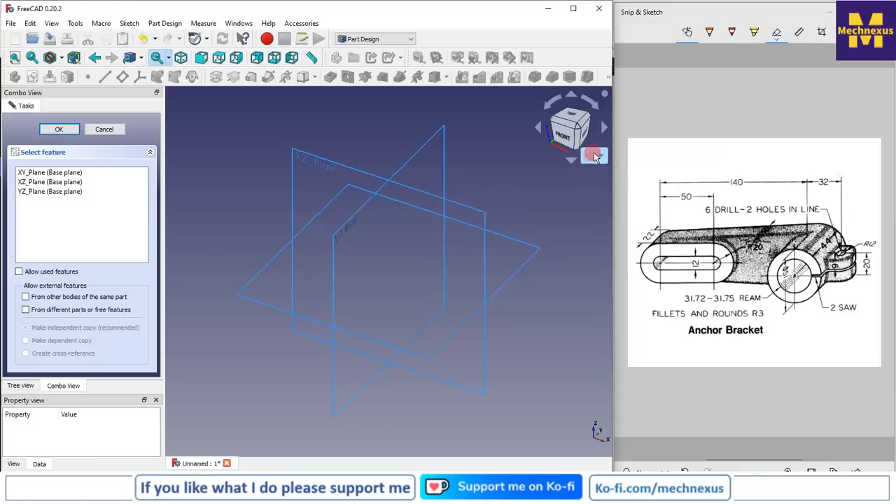I will close this file and create a fresh new file. I create a body and then create the sketch, and I will select this XZ plane, and I will make my center, this hole center, at the origin point.

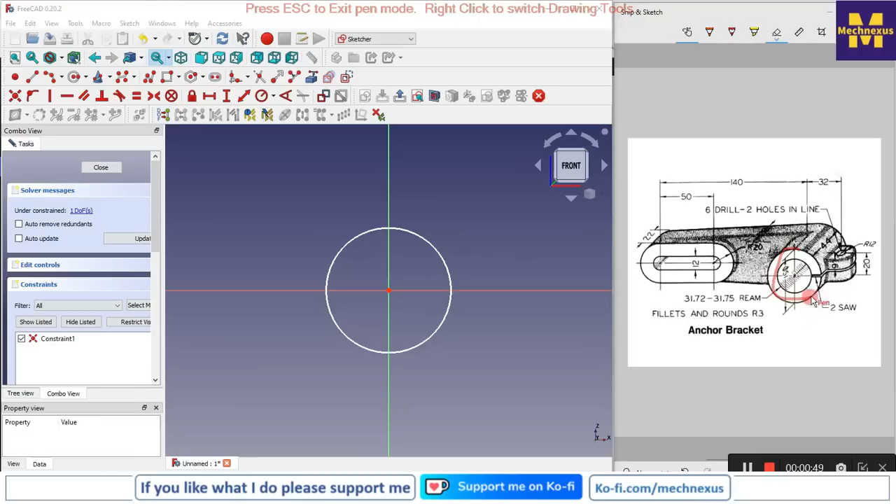So first I will make this circular extrude like in this direction, and then on the back side I will create this whole profile, and then I will extrude it. So that is the idea of the modeling.

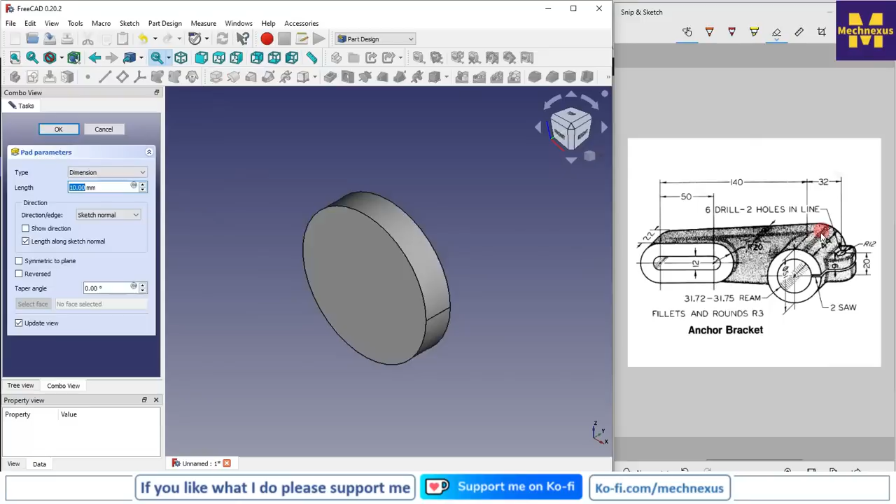Now I will give it a diameter. So diameter is 51, so I will give 51, press enter, and now I will come out of the sketch, and I will go for the pad. Pad dimension I see here is 44, so I will give here 44 and I will say OK.

And now on the back side I will create the sketch, and I will switch to the isometric to know that. So I will move to the rear view, and now here I will project my diameter.

Okay, and now I will draw the two lines, approximate lines, and then I will select this and this, and I will give tangential relation, and same here.

And now I will draw a 3-point arc here, and I will make this and this point as horizontal, and I will make this and this tangent, and here radius is R20, so I will give it R20.

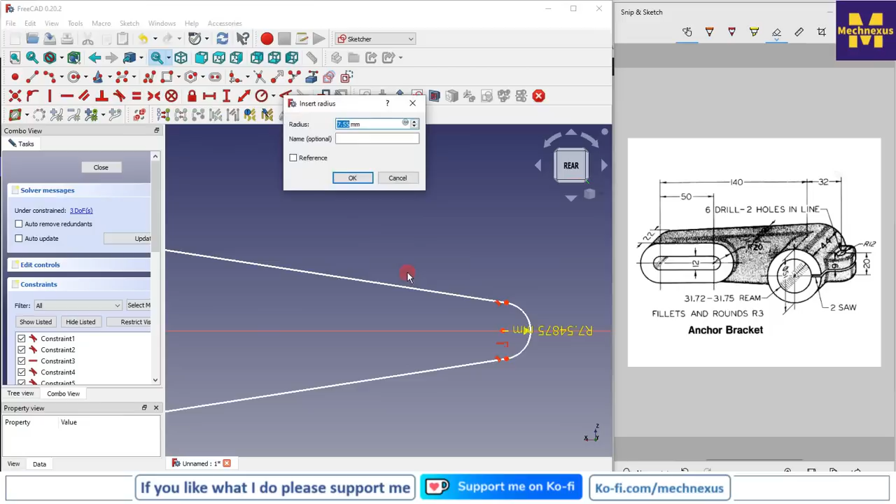And now I will draw a 3-point arc here as well, and I will make it tangent.

And now I will merge these center points. So here is a conflict, so I will select this constraint 3 and I will say delete. Again there is a constraint 2, so I will say delete.

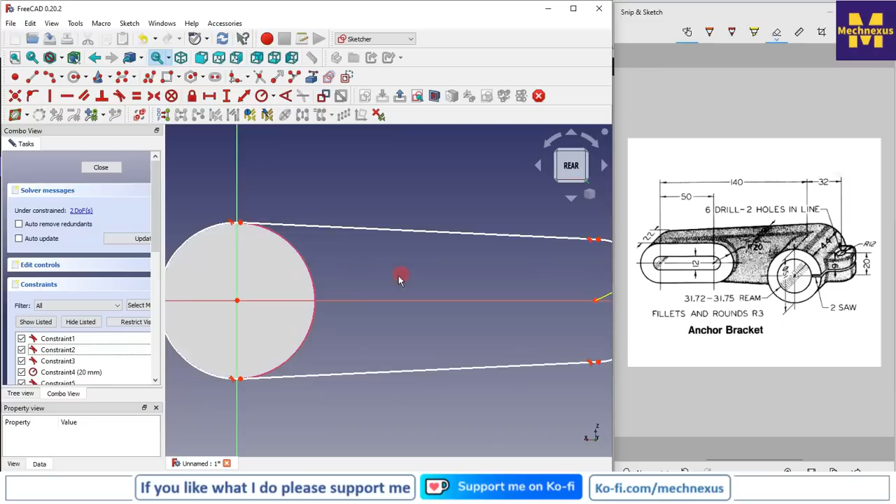Okay, now I will give my dimension from center to center. Here it is 140, so I will give here 140.

And now we will see what is unconstrained. So this is the unconstrained, so I will select these two center points and give horizontal constraint. So now our sketch is fully constrained.

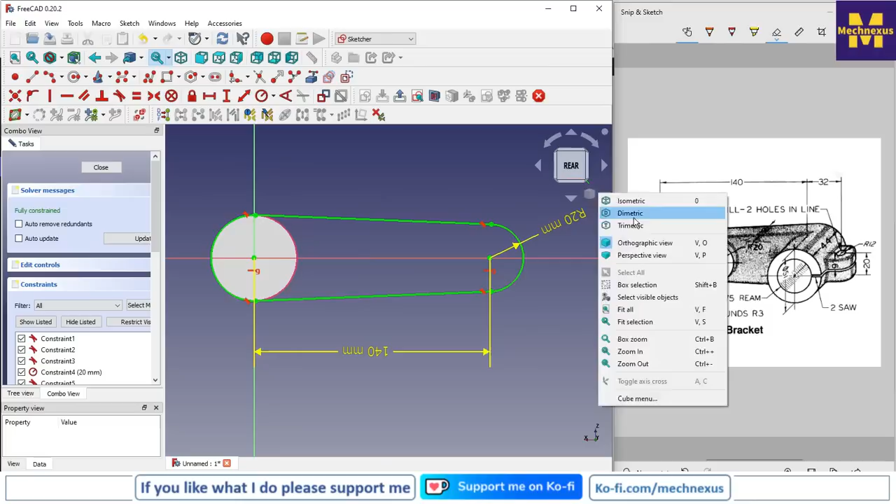Now I will come out of the sketch and switch to the isometric view, and I will click for the pad. Here I will reverse my direction, and here the pad distance is overall given as 22, but here I am unable to read the dimensions.

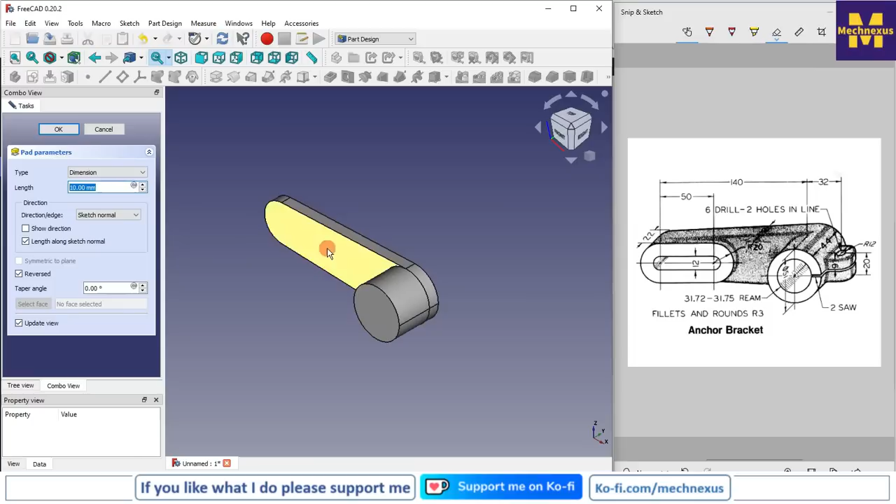So I will give it approximate, later we can change. So whole it is 22, so I will give the 10. So it is 11, so I would consider the same thickness, so I will give the 11 and I will say OK. Now here you can see that these two extrude features are merging.

So to resolve that, I will click on pad 1, and here in part design refine I will set true.

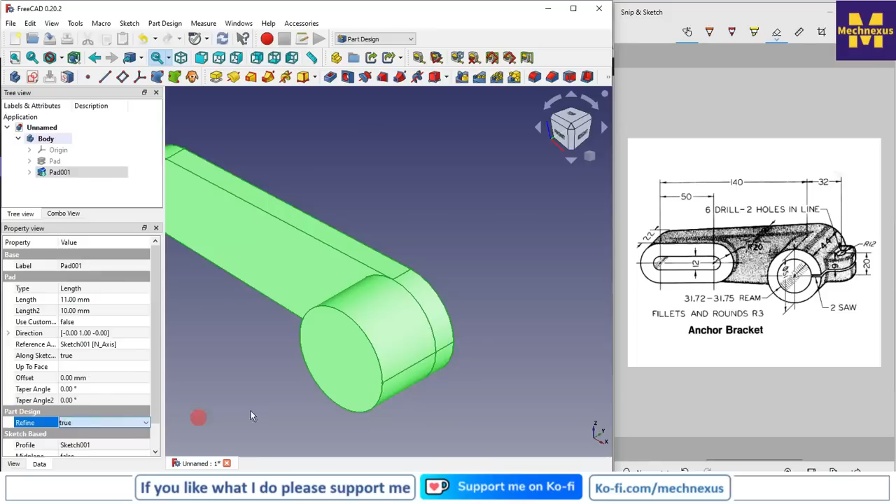Okay, so now I will create this pad here. I will select this face and say sketch, and I will project this arc. I will click on the edge and project it, and then I will select for the slot.

And now slot radius is R20, which is given here. Now I will give center to center dimension, which is 50, so I will give it 50.

Now I will close my sketch and I will go for the pad, and here I will give it 11 mm.

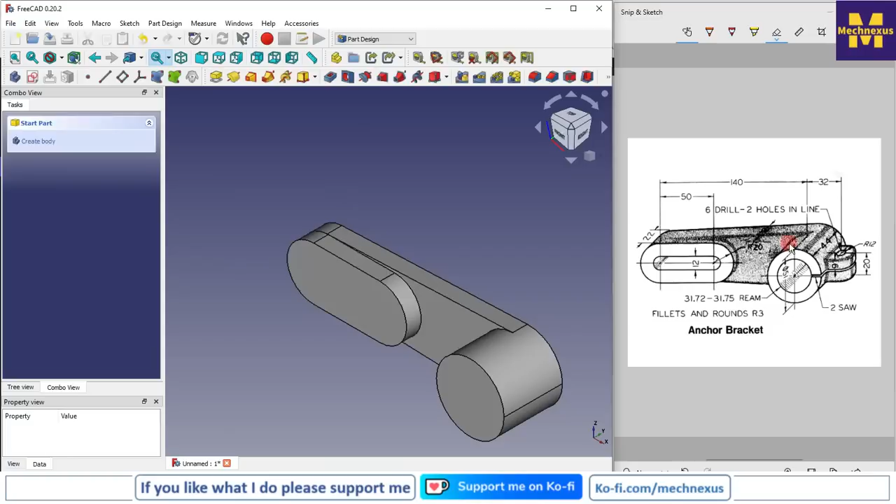Okay, so this 11 mm looks like too much, so I will give this pad 15 mm, and this pad would be 7 mm.

Okay, so now material removal we will do later at this location and these locations. First we will make the solid features, and now we will make this feature, this one here. So for this I will create the sketch on this face. I will select the face and create the sketch, and I will project my diameter.

Okay, so overall height is 20, so I will create a 3-point arc, and I will make it equal. I will say merge, and I will delete this constraint. This as well. Now I will drag my arc here.

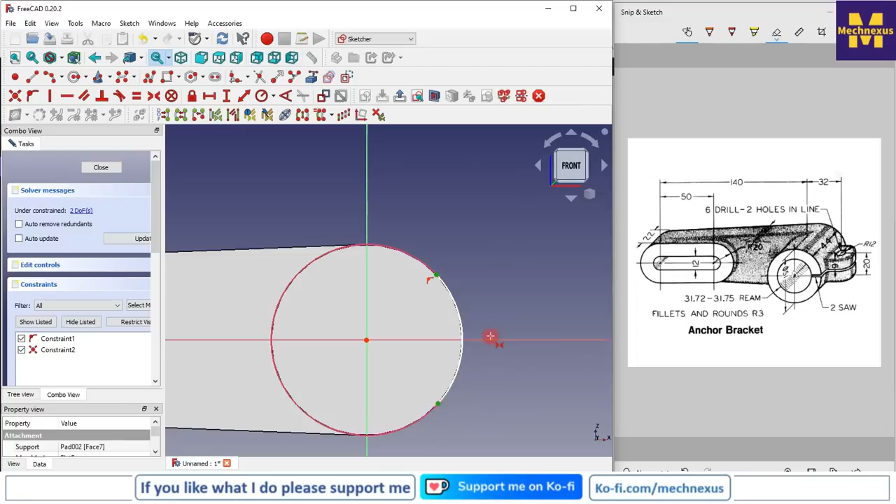Now this is the 20, so it should be symmetric. So I will select this one and this one and my axis. Now it is symmetric. Now I will select the polyline and I will close my profile.

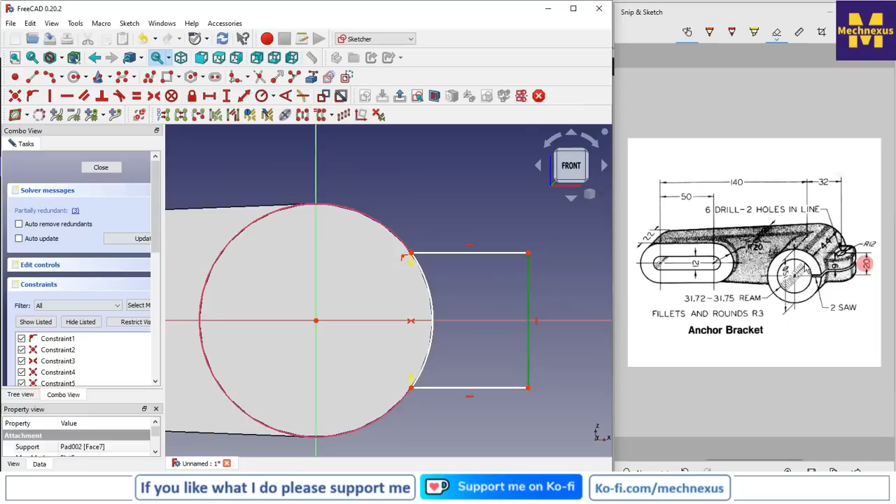Now I will give it horizontal constraint. This one will be horizontal. Now this dimension is 20, so I will give it 20, and here is a R12, so I will give this one R12.

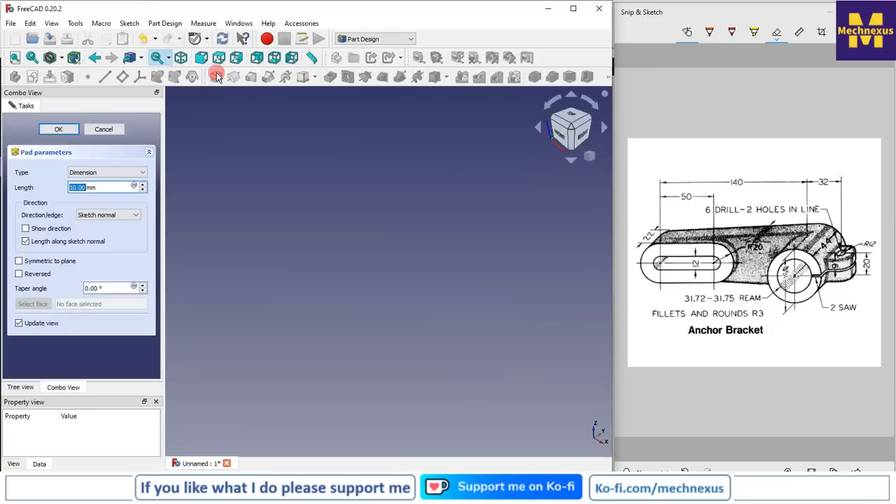Now I will come out of the sketch and click on the pad, and I will say here reverse, and from here I select up to face, and I will select my back face, and I will say OK. Now I will switch to the isometric.

Now we will do the material removal. So first we will remove the material at this location. So I will select this face and I will say sketch.

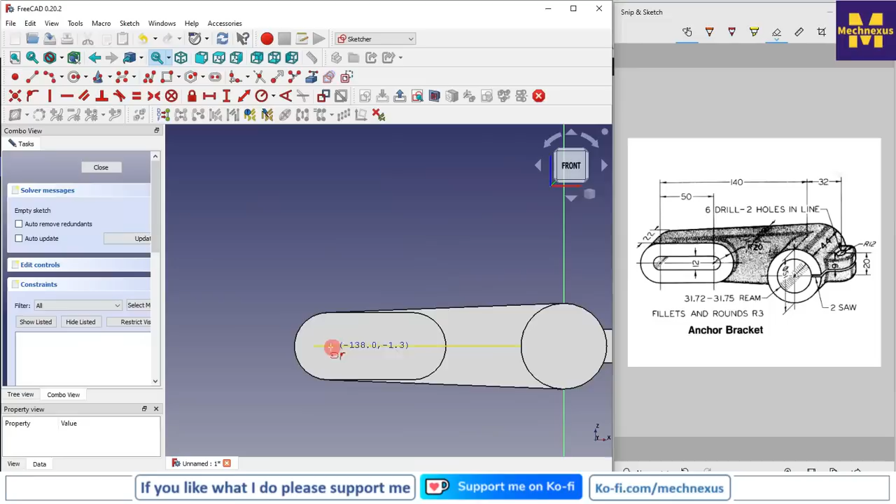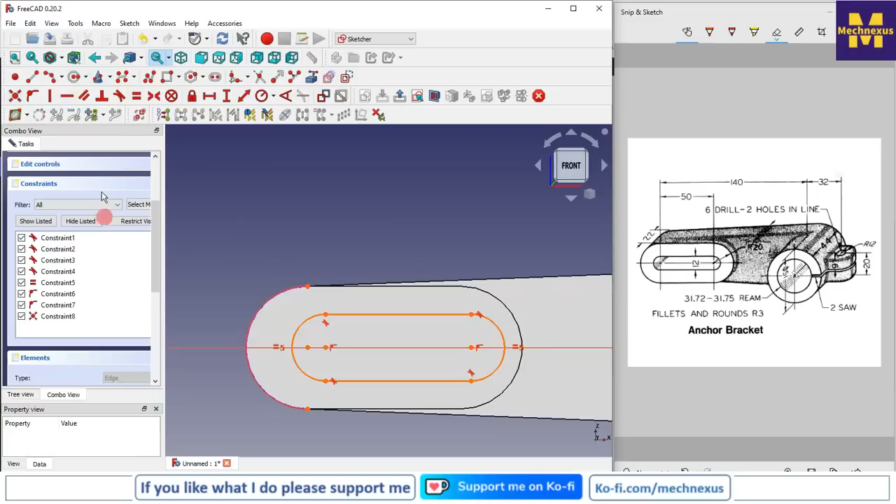And now I will select the slot and create a slot here, and I will delete this, and I will project my edge, and I will merge this to center, and I will delete this constraint.

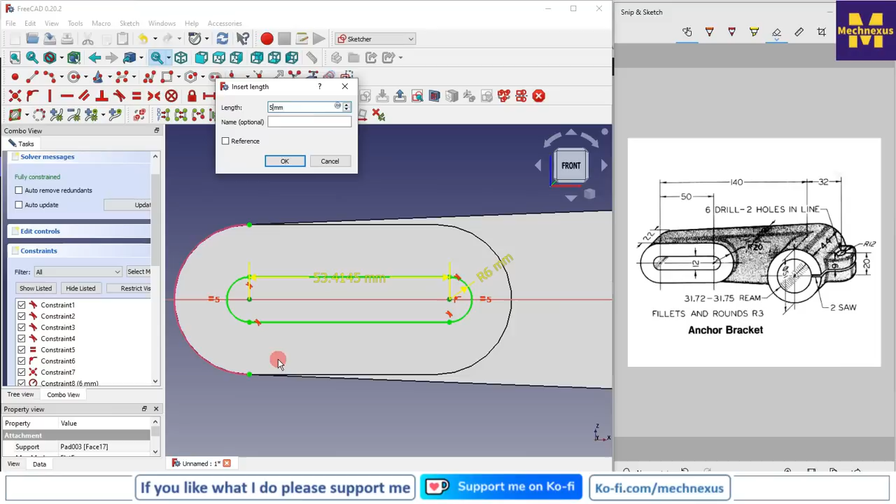So now diameter is 12, so radius will be 6. Now center to center dimension is 50, so I would give it here 50. So our sketch is fully constrained.

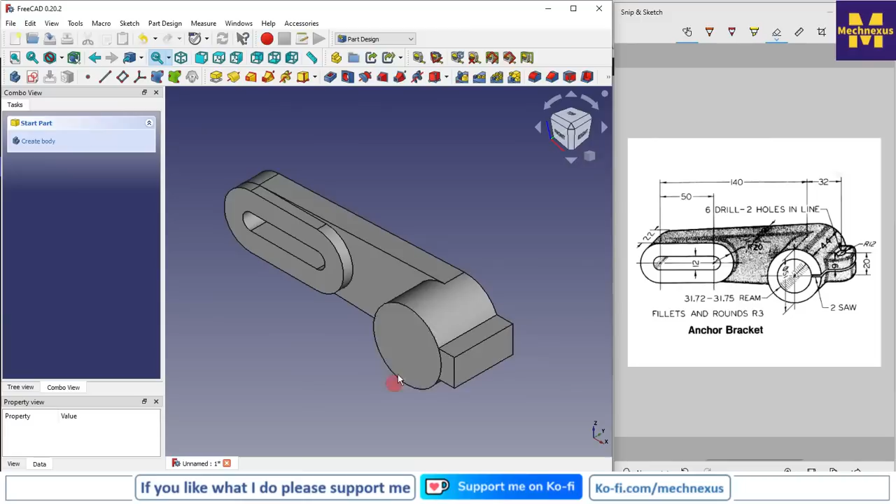Now I will come out of the sketch and I will go for the cut, and I will say through all. Same way here we will do it, but we will do it in a single sketch here.

Now I will select this face and create the sketch, and I will switch to the isometric view, and now here it would be at the center, so I will project my edge. I will select this edge, and I will project this edge as well, and now I will select the 3-point arc.

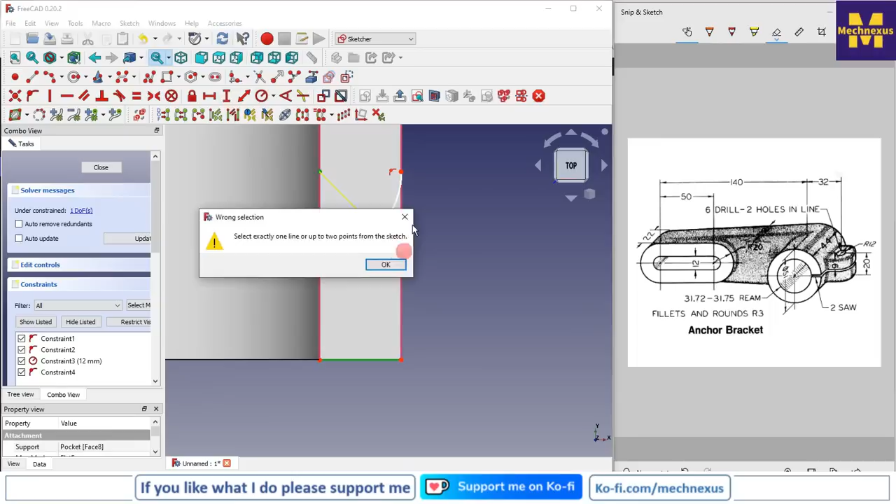And now I will switch to the top view. So this radius will be R12, so I will give here 12, and I will make this point and line coincidence, and from the edge it should be from this point to this one. I will give 22 and I will say enter, and now I will close my profile.

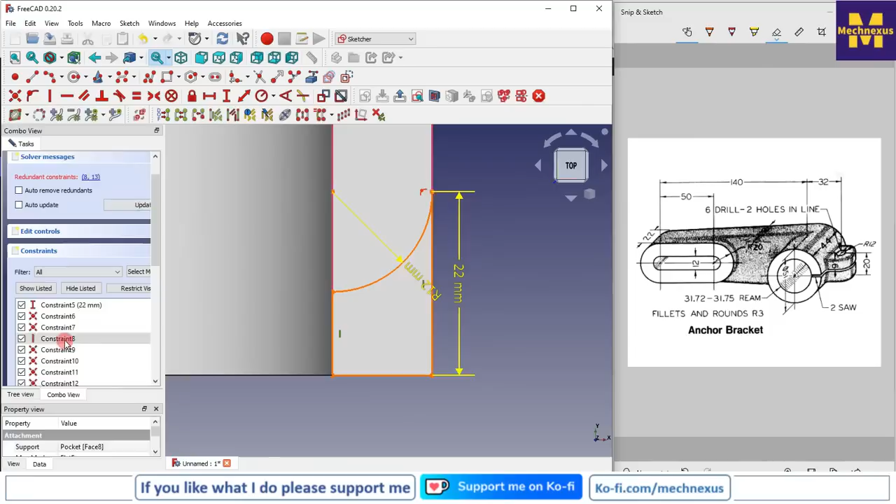So I'll select the line, so here is a conflict, so I will delete the constraint. Okay, so now our sketch is fully constrained.

Now we will simply remove the material. So I will go for the cut operation, and here I will say through all, and I will say OK.

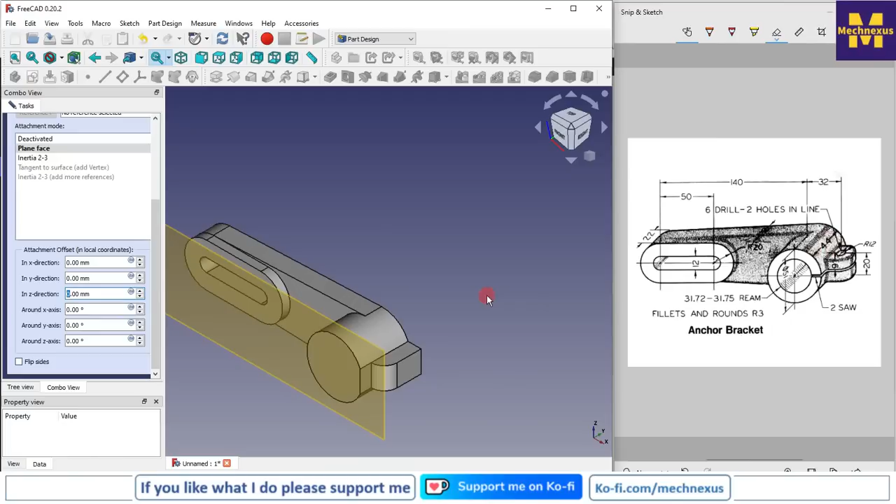Now I will select this face and create a datum plane at a distance of 22, because we see our dimension here is a 44, so I will give 22, but I want in a reverse direction, so I will say minus, and I will say OK.

Now I will say mirror, and from here I will select my reference, so I will select this one. So you can see it got mirrored. Now I will off my datum plane.

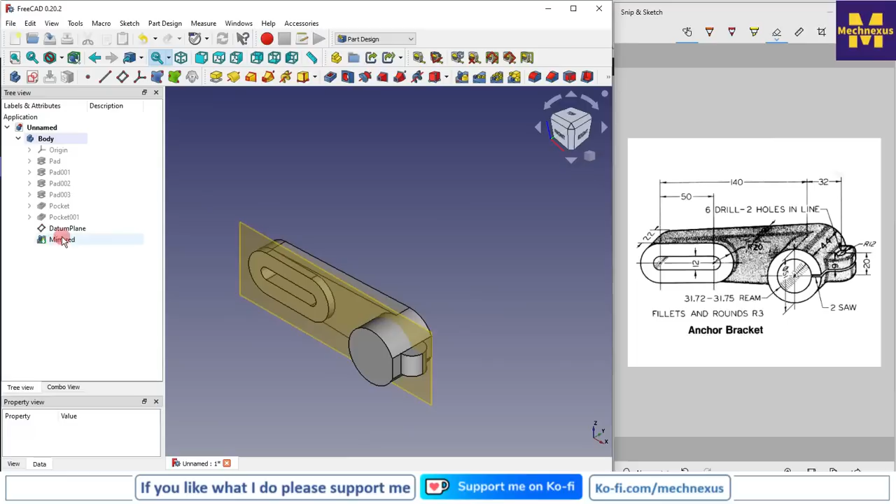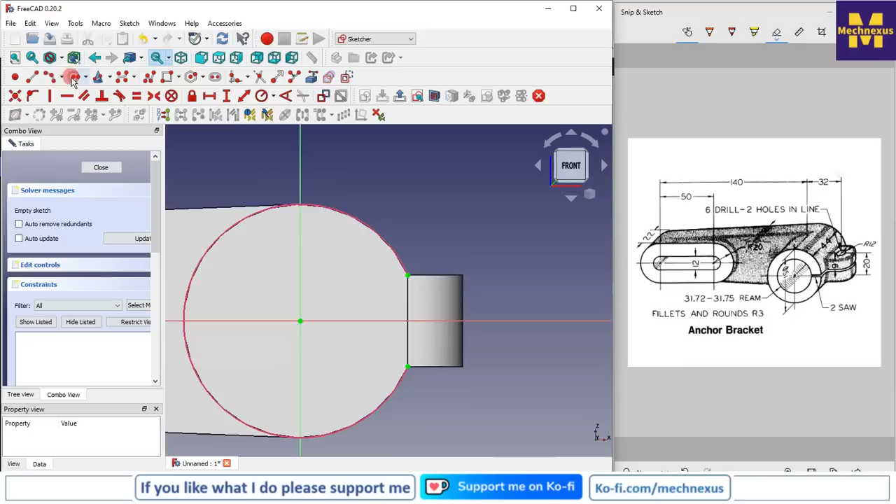Now we will close the material at this location. So for this I will select this face and create a sketch, and now I will project my diameter, and I will create a 3-point arc.

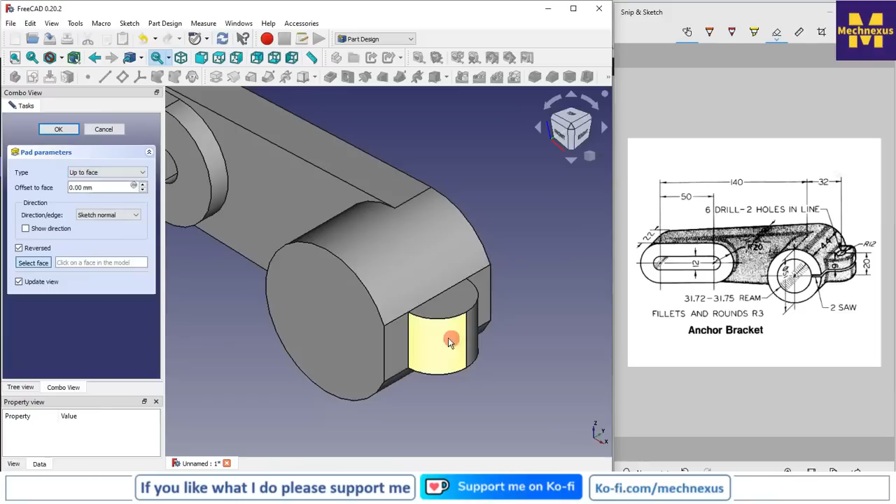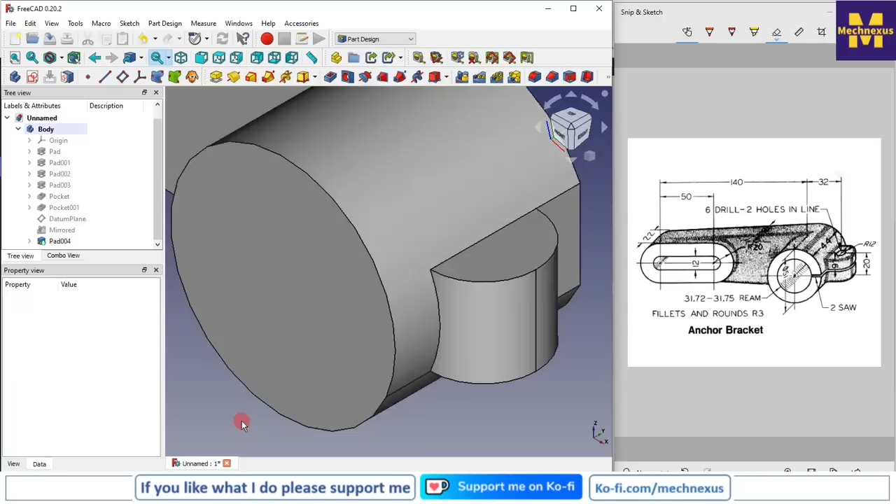Okay, now I will merge these 2 points and close the profile. Now I will come out of the sketch and go for the pad, and I will say reverse, and from here I will say up to the face, so I will select this face and say OK. Now this does not look good, so I will select my feature, which is the pad, and I will say refine true. So you can see that it got removed.

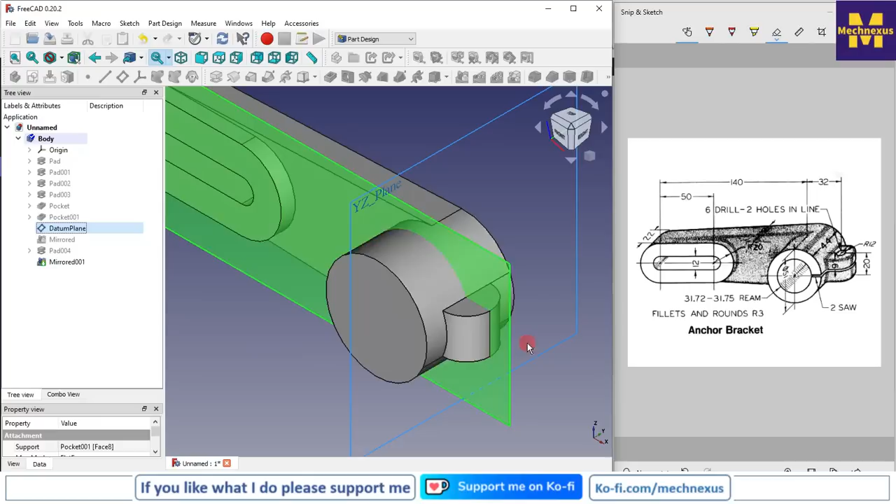Now I will select my pad 004 and go for the mirror, and here I will select my reference manually. So I will select this datum plane, so you can see that it got mirrored, and I will say OK. Same way I select for the mirror, and refine, I will say true. Okay.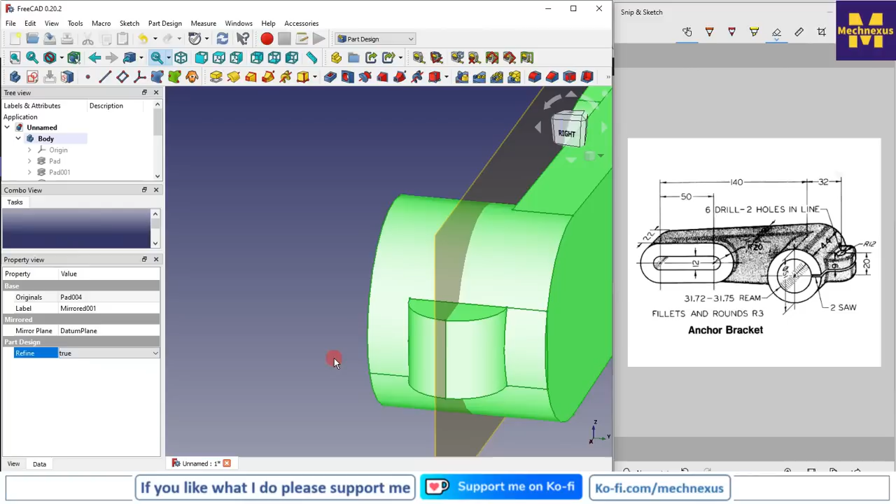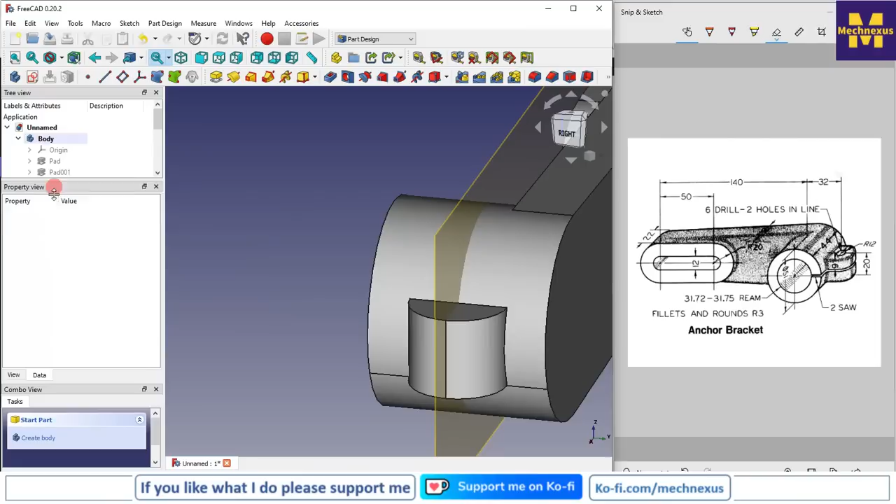So better I split it up like this. Now I will turn off my datum plane and switch to the isometric view. Okay, so now

We will select this face and I will create the sketch, project my outer edge, and draw the circle. The diameter is given as 31.72 to 31.75, so I will select the maximum. I will select this one, go for the diameter, and say 31.75,

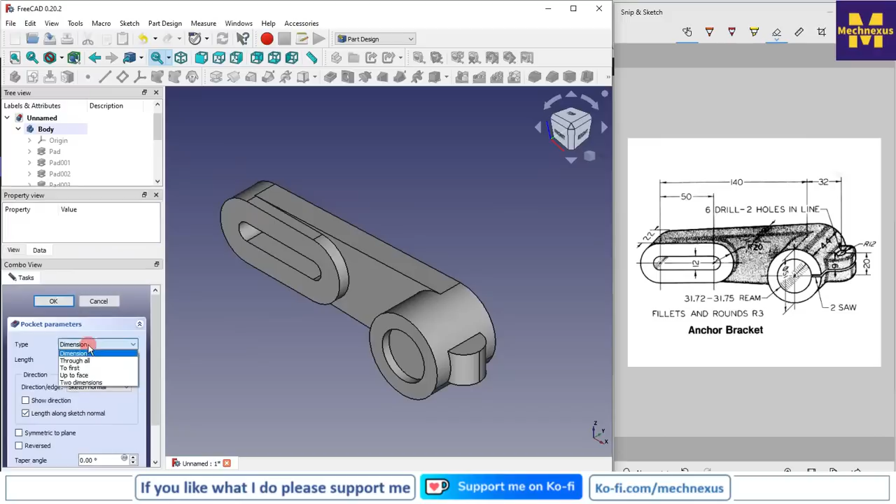and I will close it. Now I will go for the cut, and from here in the property manager I will say through all. Instead of making this sketch, we will add this feature as well.

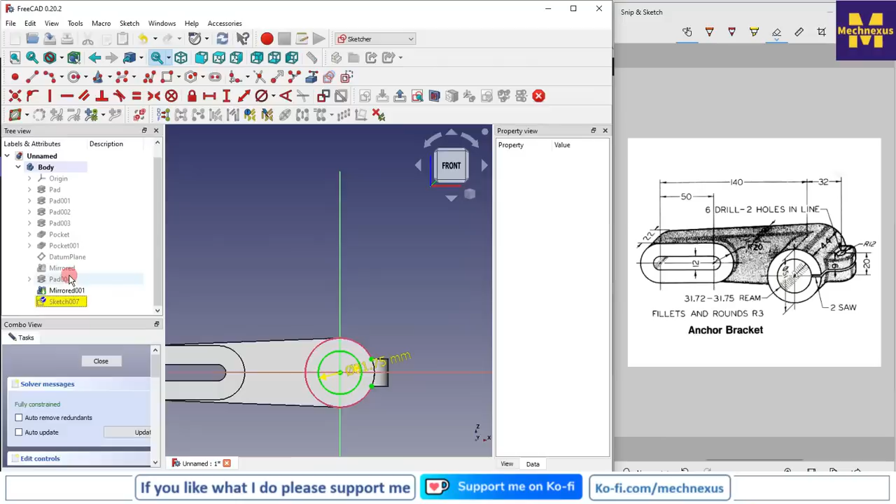So better I move my property view to the right side. Okay, now I will modify this sketch and create a rectangle, and I will delete this one, and make this 2-point symmetric.

Okay, so I have kept this tab separated. Now I will make it symmetric, so I will select this point and this one and my axis. Now I will resolve the constraint. I will delete this one, and now I will give my dimensions.

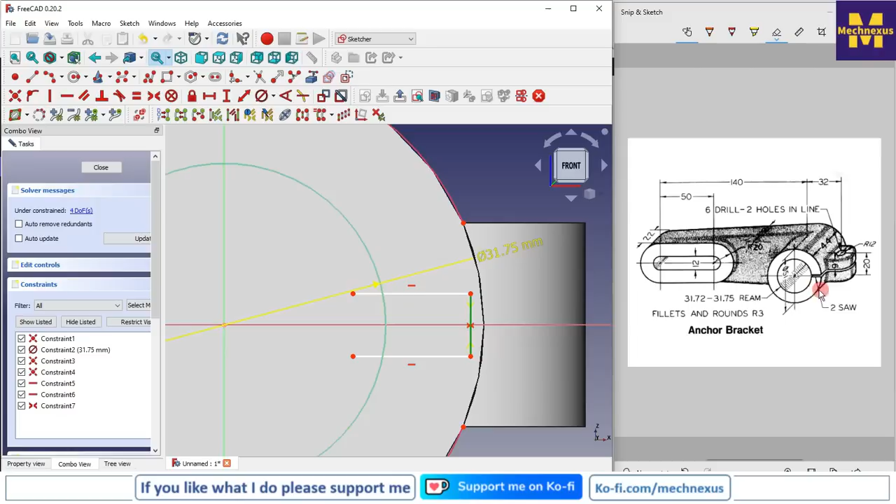So this is a 2 saw, so this is 2 mm, so I will give here 2 mm, and now I will trim my geometry. I will trim this one and this one, and move it outside.

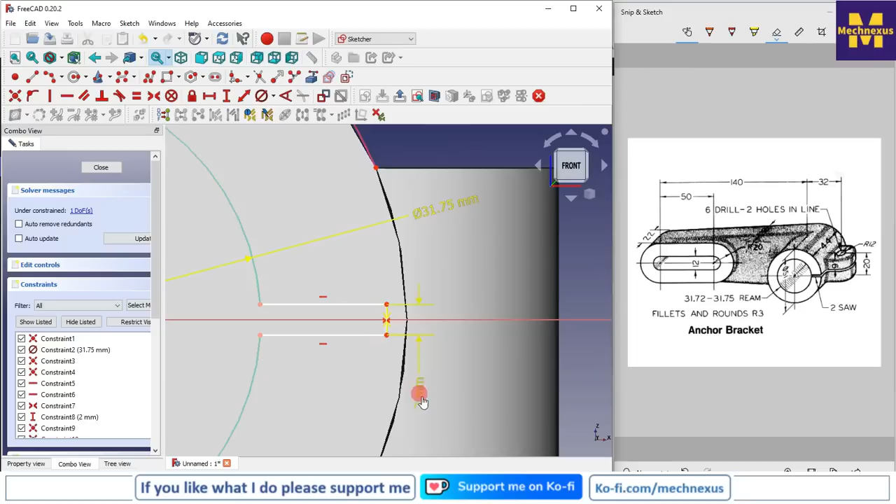And now I will select this point and this point and give dimension, say 40. Now I will close the sketch and go for the cut, and here I will say through all, and say OK.

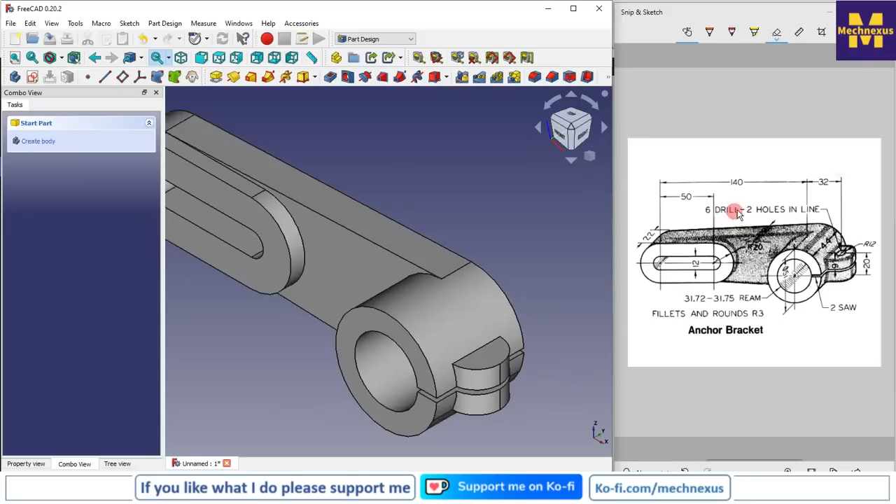And now I will make these 6 drilled 2 holes, meaning one on the top and other on the bottom. So I will select this face and create the sketch, switch to the isometric view, and now project my arc here.

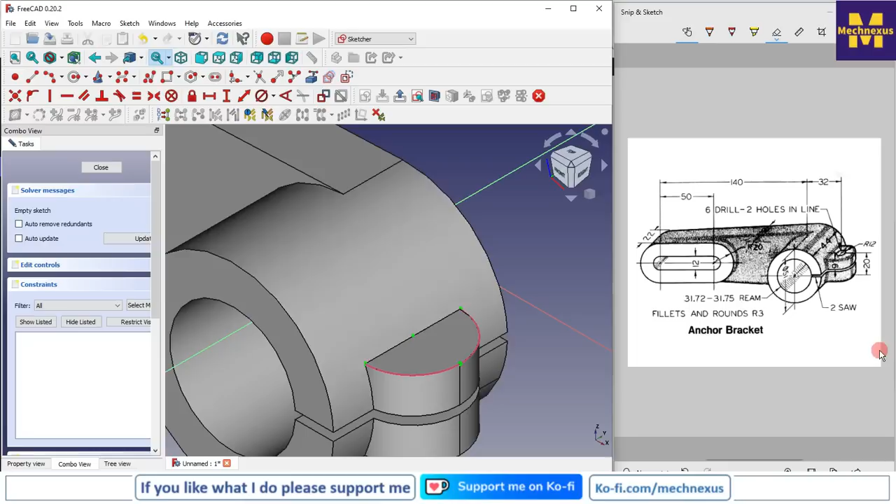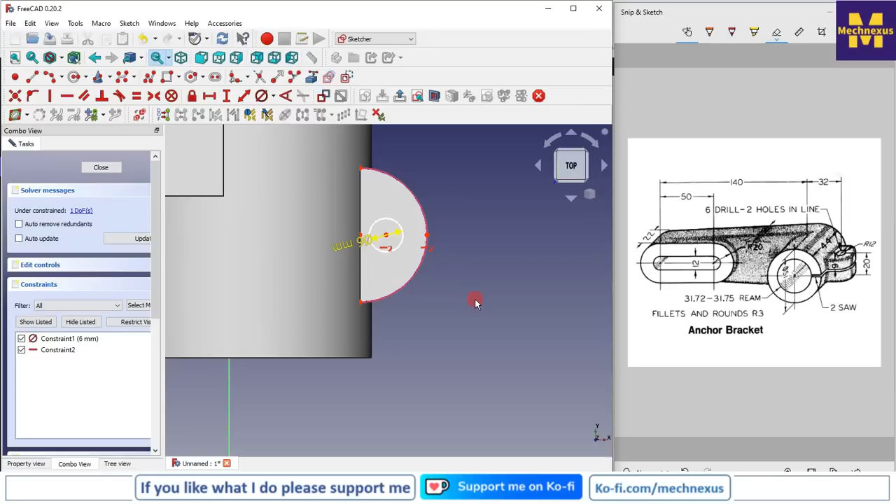And I will create a circle and give it a diameter of 6, and now from the top I will select this point and this point and give horizontal constraint, and position is 32 from the center.

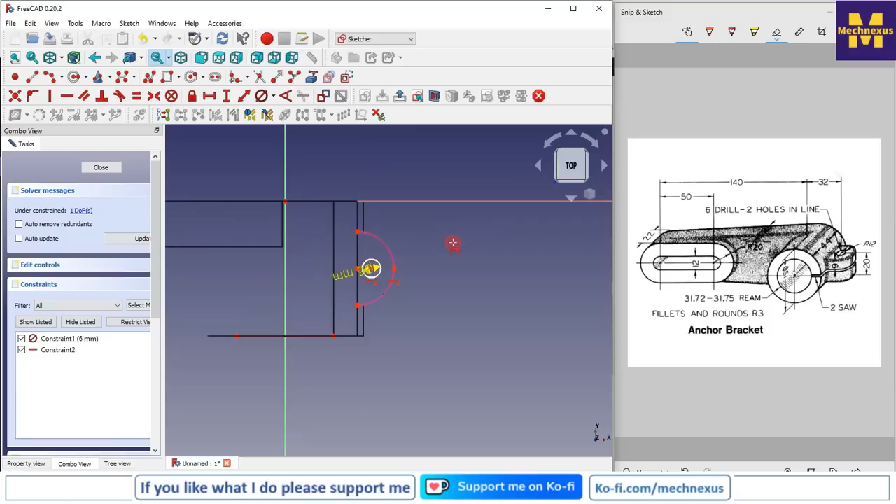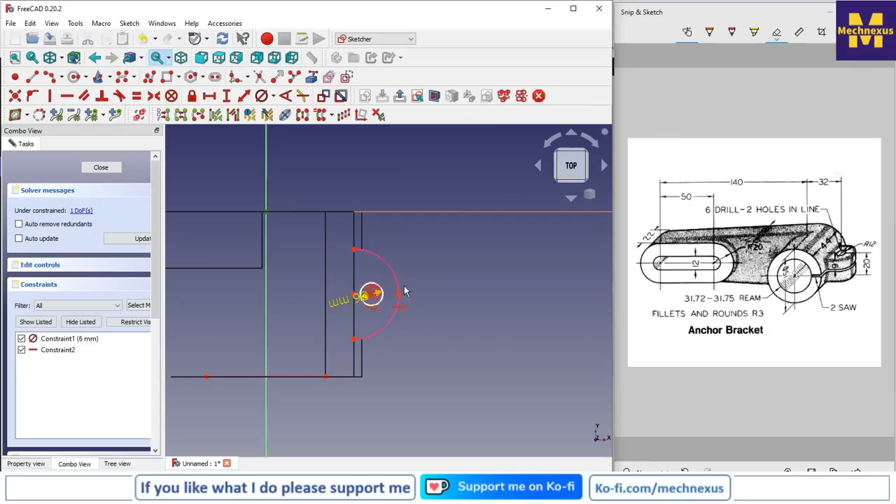So for this I will try to project this edge, and switch to the wireframe and switch to the top view. So from here to here it should be 32. I will select this point and this point, our origin points, and so this is the 32.

Now I will switch to the flat lines. So this is going outside.

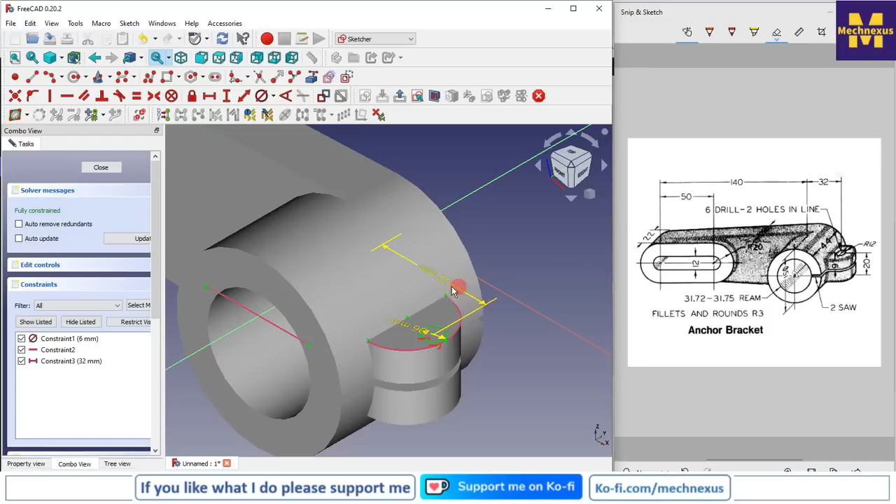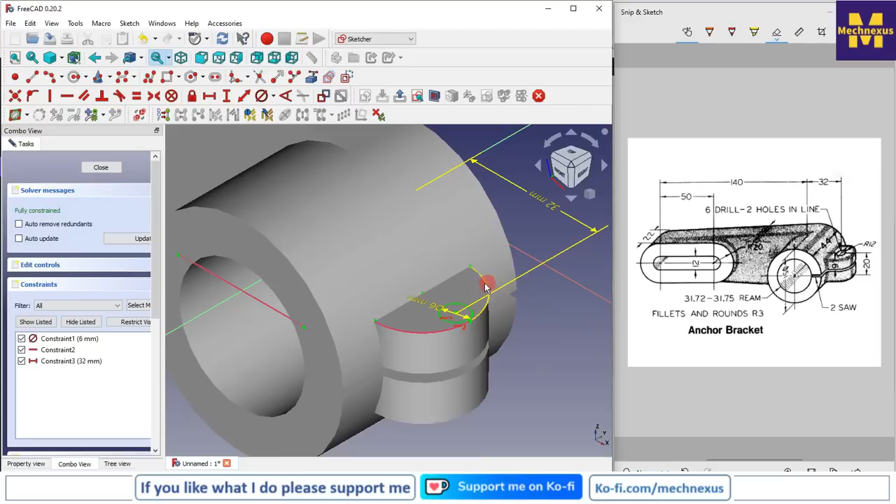So it should not be 32 because this radius is R12, and so what we will do, we will make this dimension approximate, or simply we should not give this dimension. What we will do is simply give here from here to here a dimension of 6,

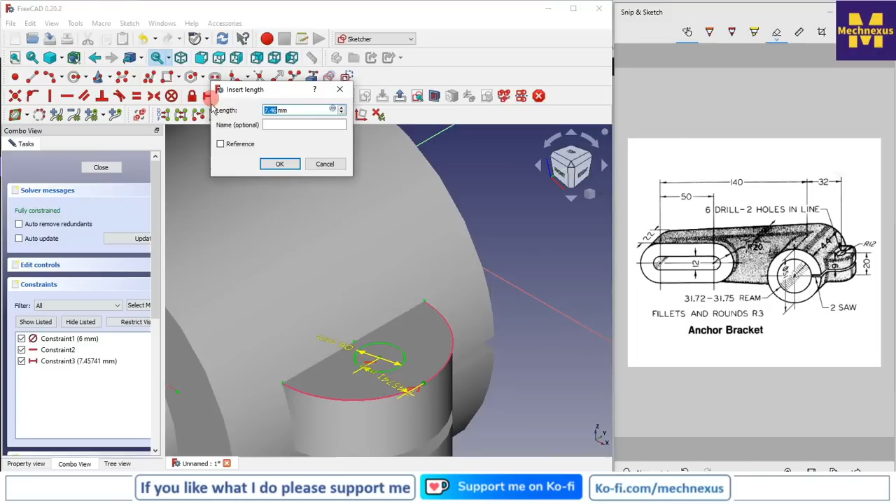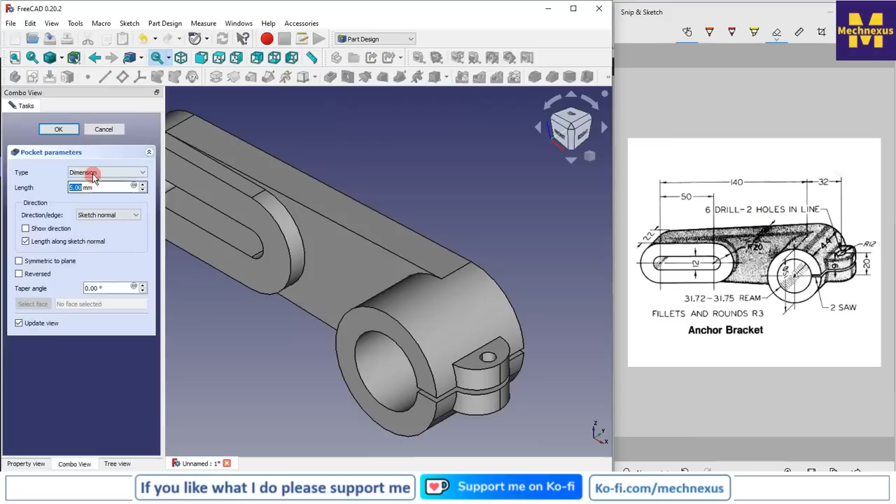and I will close the sketch, and go to the tree view and go with the flat lines, and now go for it - it's a flat drill, so I will simply go with the pocket feature. In fact it should be with the hole features, so no problem, we will use the hole feature. So now here I will give my diameter 6, and I will say through all, and I will say OK.

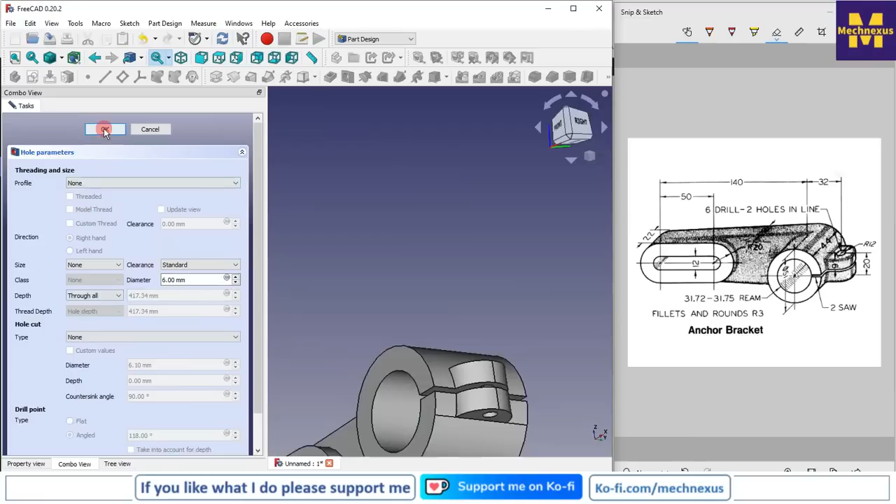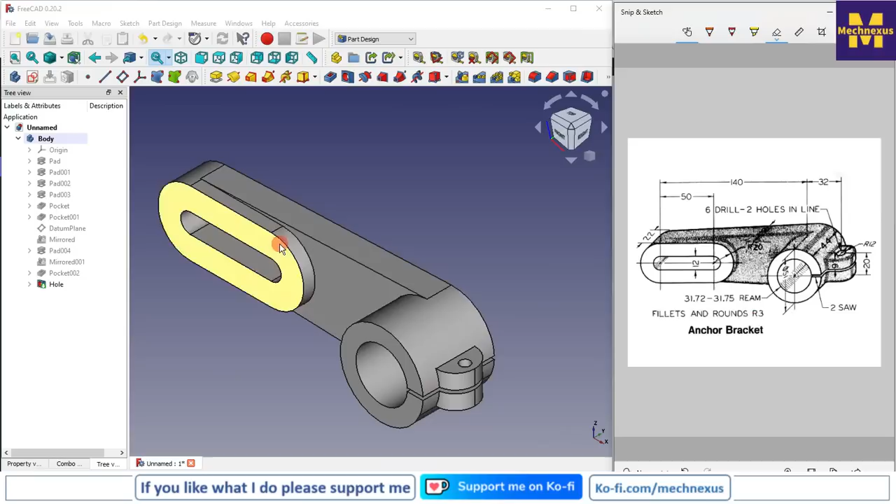Now I will switch to the isometric view. So we have made all the dimensions, all the features of this part. There is a fillet and round R3, so we can give the fillet to all the edges here, and now we can give some color. So I will go to the appearances, and here I can give the material, so I will give chrome.

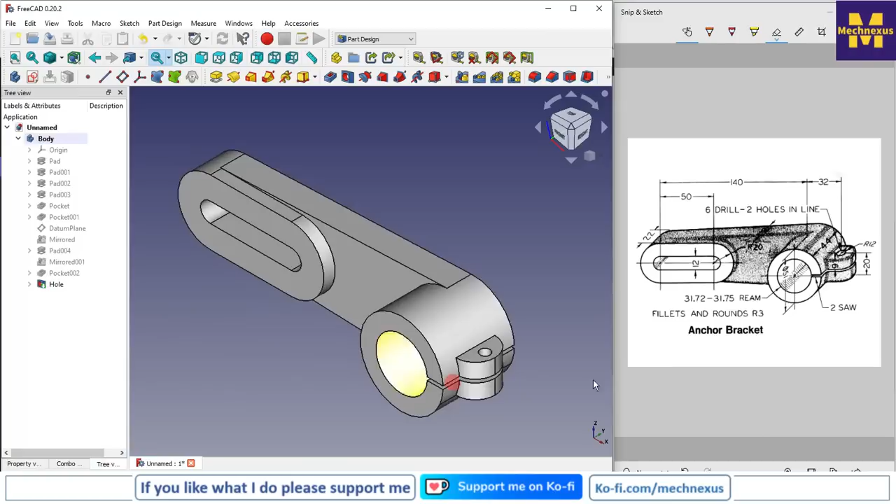So this is how we have converted our 3D drawing of the anchor bracket into the FreeCAD 3D model. So friends, this is all about this session, how to model an anchor bracket in FreeCAD. Thank you for watching.